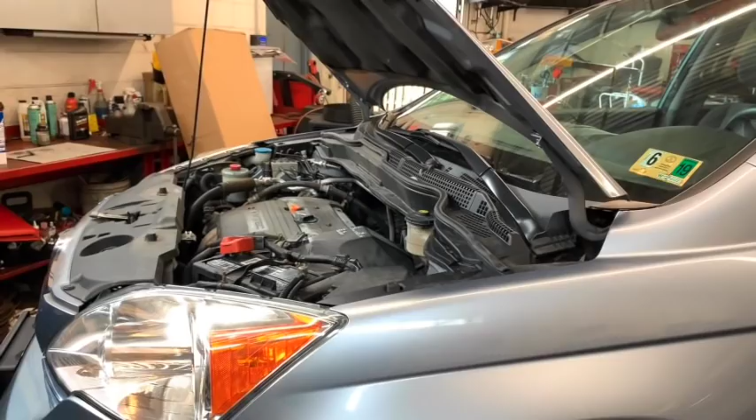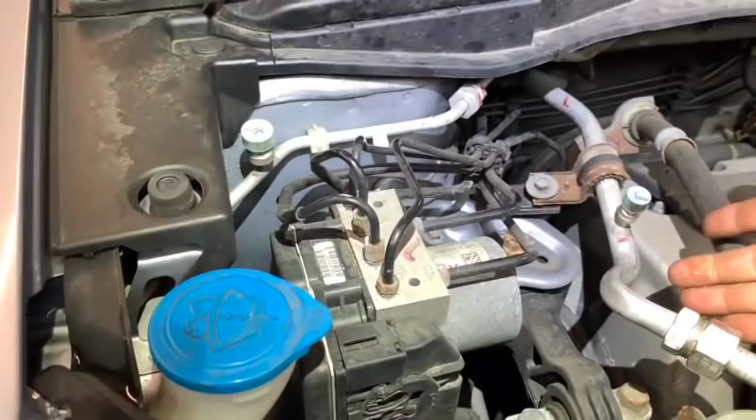I have a diagnosis video. So this is a 2008 Honda CR-V. The customer complaint is that the AC is not working. Usually the first thing I check is pressures, and this valve was broken, so it leaked all the freon.

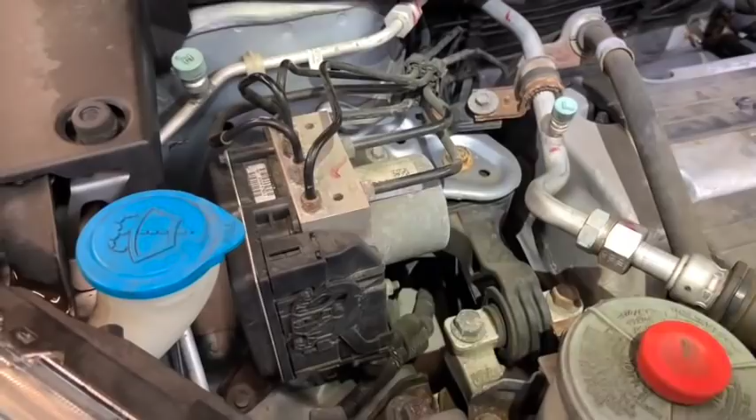It was empty, so I did a vacuum and recharged it. It held vacuum very well, so I said it looks clean, no problem. So I recharged it, but the compressor doesn't want to come on. So I want to share how the diagnosis process went to find out exactly what the issue was on this car. I already know what the issue is.

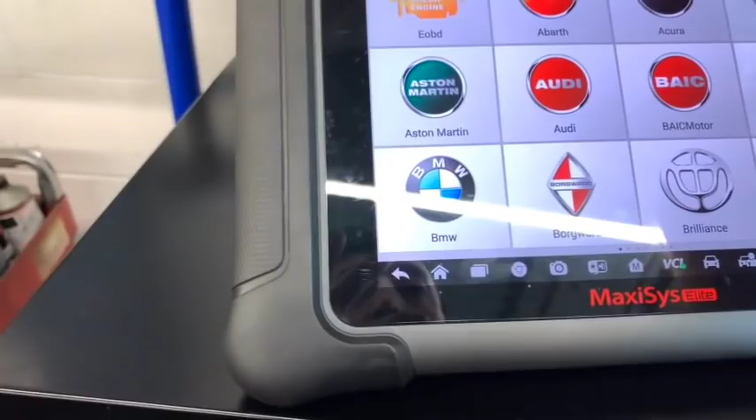So first, I want to just show you a little bit of what I did and what you can do when you have a problem, because it might not be the same on your vehicle.

Sorry for the glare, but it is what it is. Let me try to put this someplace different. I was here, well, not as much.

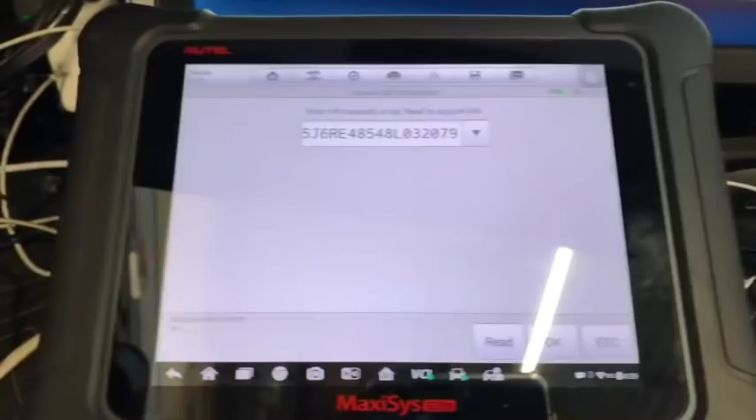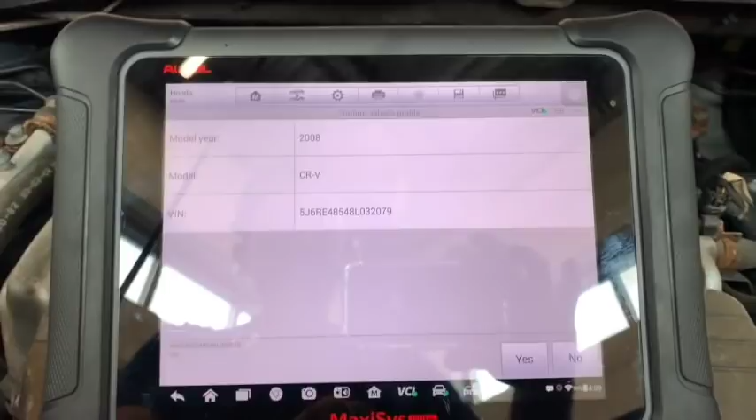All right, so I gotta take you guys to the car to show you the clutch activation. So that's probably the best I can do. It's an Autel, obviously. Sorry for the chop noise.

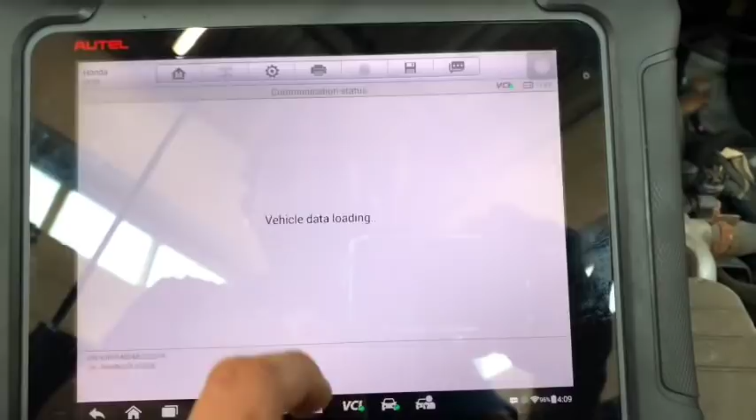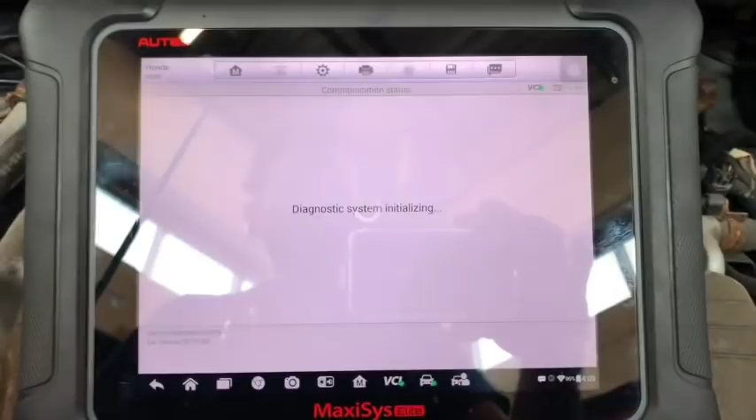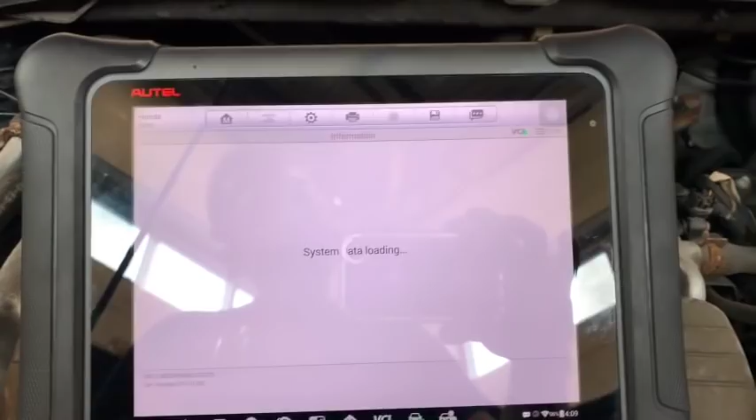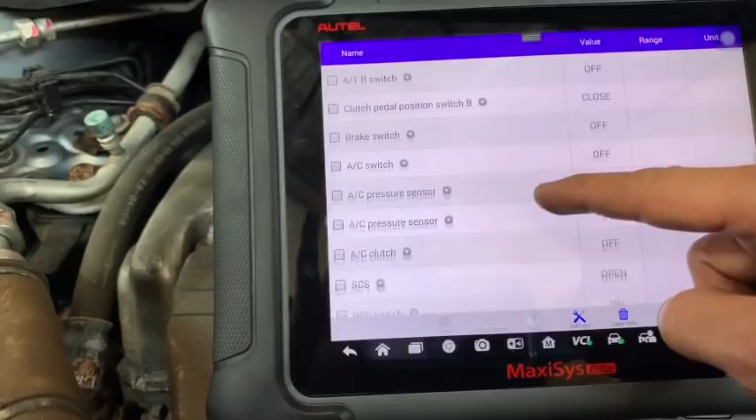So in this case you go on the engine computer, because this is a manual air conditioning, so you will not have that function. And it's just reading live data. So we're going to select the... I'm scrolling quick because I know pretty much where they are. Okay, right here. So you have pressure, clutch, and switch. And as you can see, they're all off.

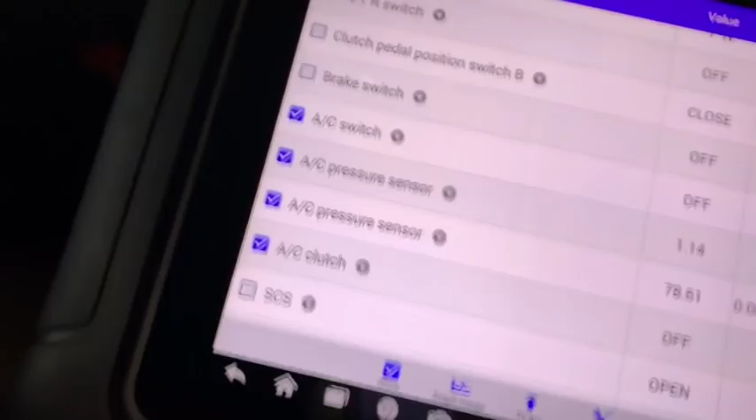So now the car is not running, but you can see the ignition is on, the blower is blowing. So what you have in here is the AC switch, at least on and off, and it's not happening. So that is my first clue. Something definitely is not working.

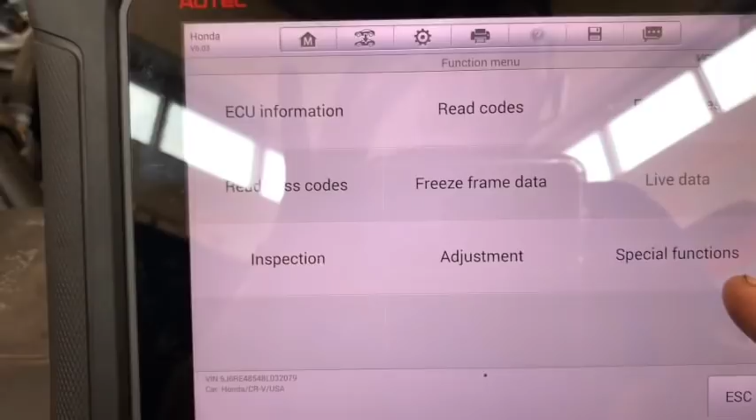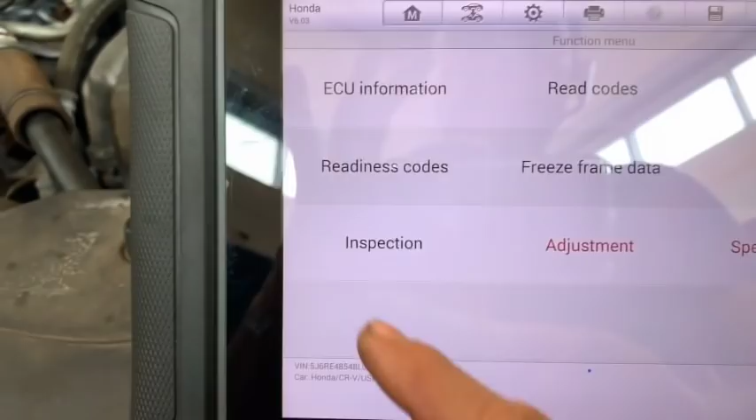But then what you can do with the scanner to find out if at least the clutch and the compressor are good, you can go to functional tests. Oh, I just got out. Sorry guys, sometimes you try to make it quick and it doesn't work. I think in this one it's special functions. No, adjustment. Nope, inspection. Oh yeah, it was the last one, right?

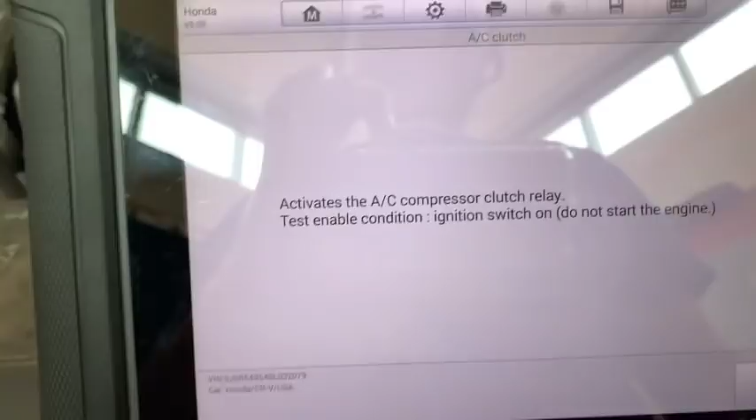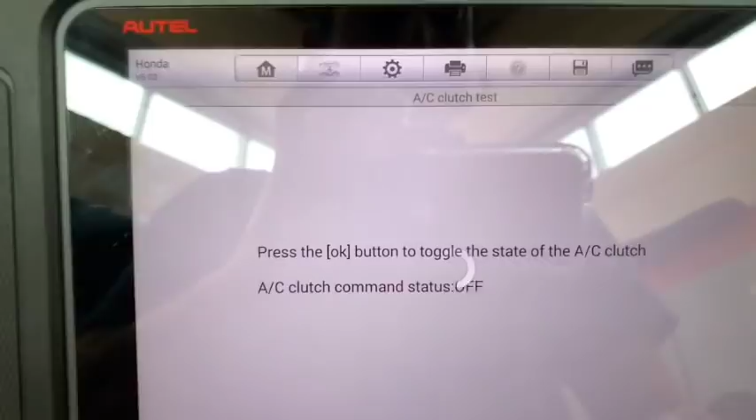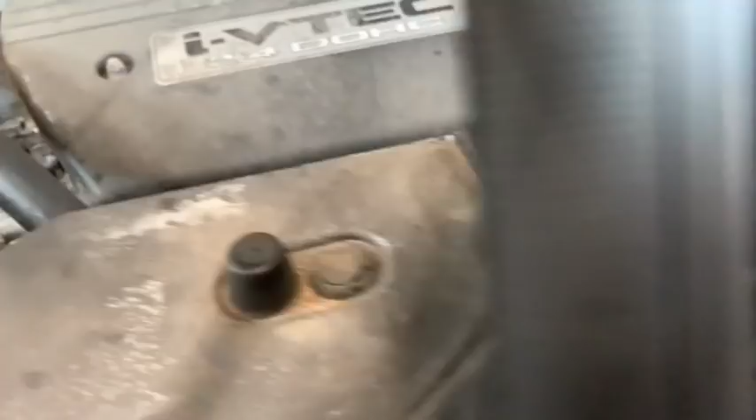Okay, so in here we will get the AC clutch. You can activate the fans, because if the fans don't work, the AC will not work either. So you can do that in here as well. As you can see, this will manually operate the clutch, and the status is off. So on and off. And I don't know if the sound will be there, but I guarantee you it's loud.

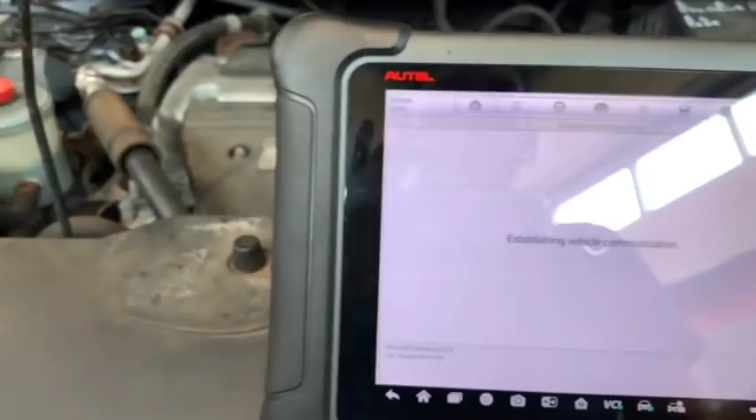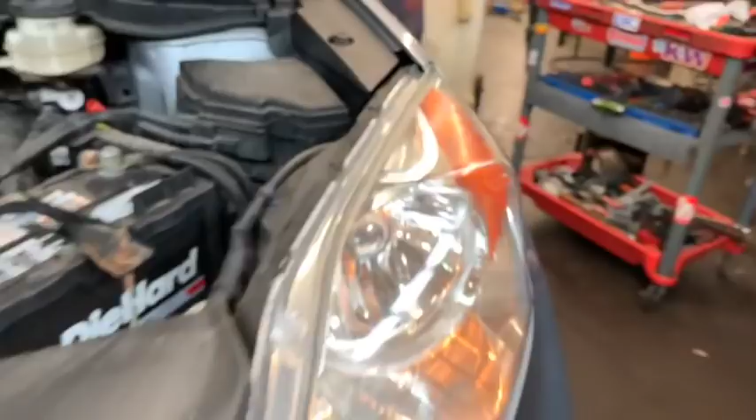So the next thing that I did, again, check the fans, and it's the same thing. And with this one, I need a light. I don't know what I did with it. Where is my light? Come on. Sorry, guys. Let me grab another one.

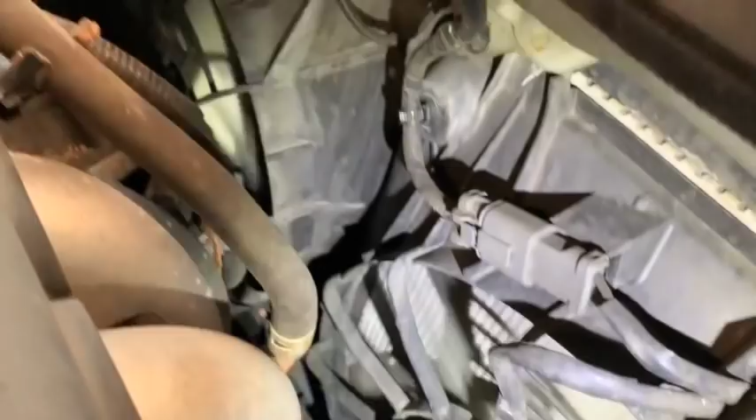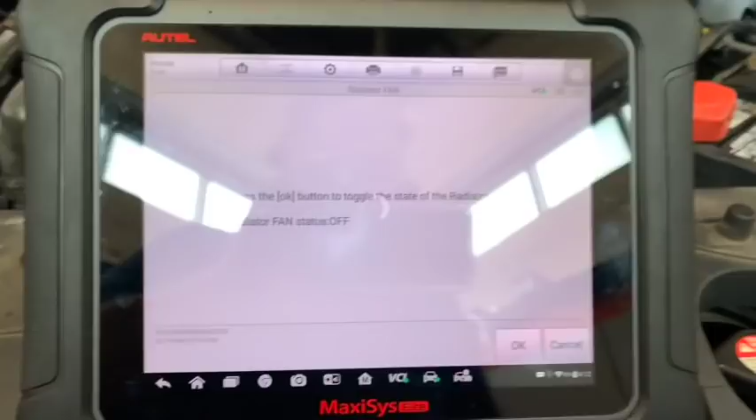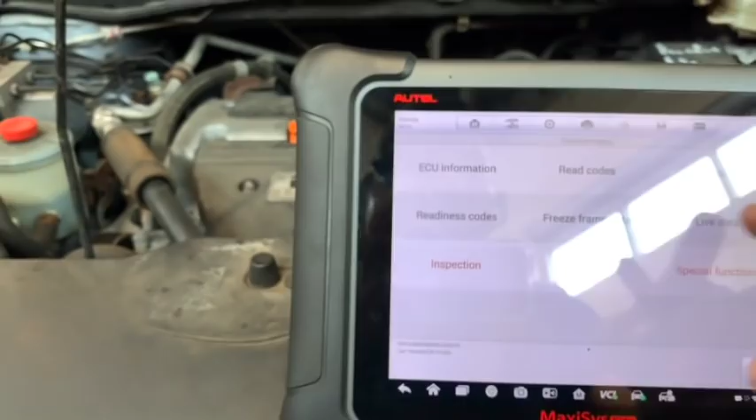So as you can see, the fans are both working, and I can activate them with the scanner. So that means the computer is able to. So again, what am I missing? I'm gonna check the pressure, because I know the pressure is good, and you can go to the live data, and hopefully you guys saw in there it's like 80 something.

Where is my other flashlight? In the meantime, I'm looking for that. All right, I'll look later.

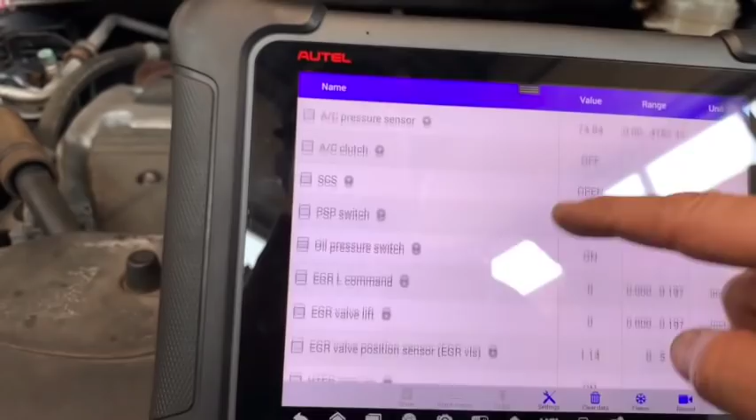And since obviously the AC is not running, you're just gonna have a static pressure. Maybe I just went too much.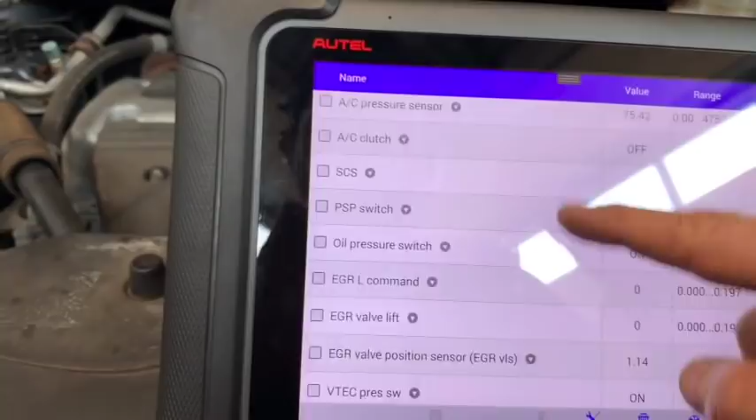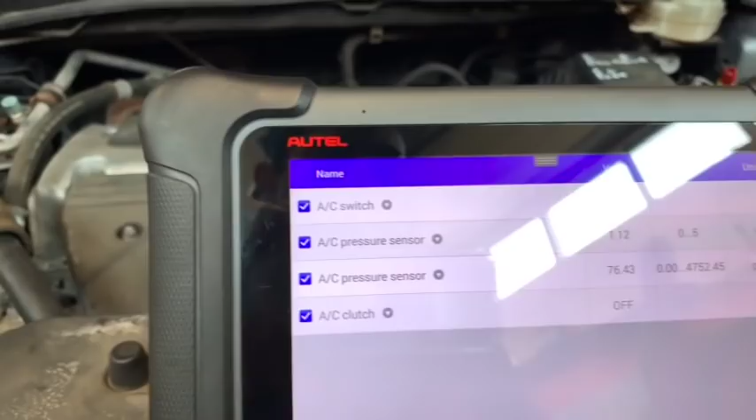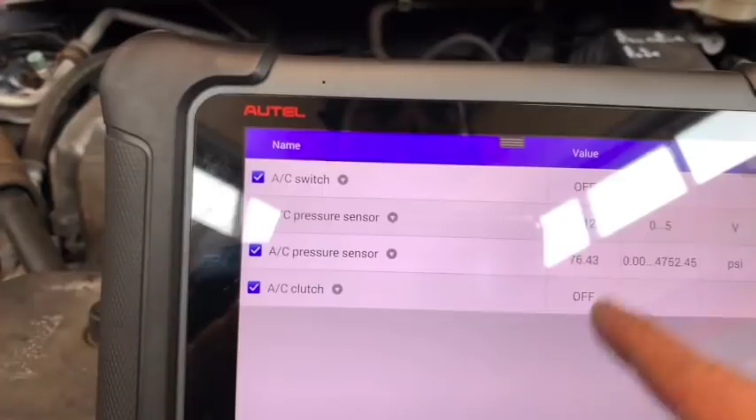Yep. So again, this is just a bit that we need to see. So we got like 76 pounds, which is, the temperature of the day is actually not that warm. And we're like probably, I don't know, 65 or close to 70. So let's call that okay. As long as you got more than 25 pounds of pressure, the compressor should work.

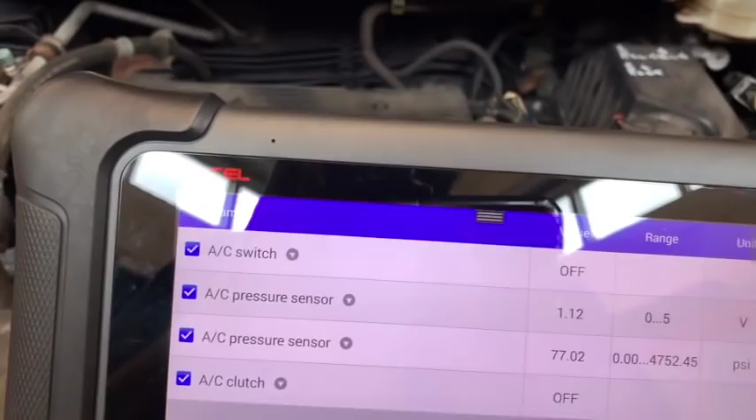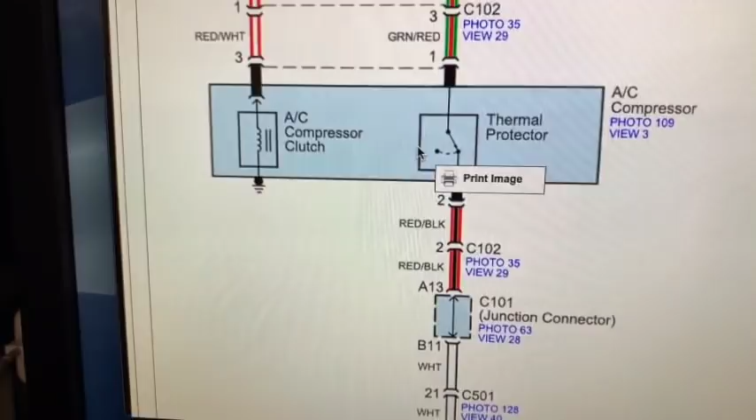The other thing, the fans need to run, and so is the blower. Otherwise, the compressor will not be coming on by default. The other thing that you have, and this is what I want to take you guys, is this compressor, this system has a thermal protector and it's normally closed. If these are open, that would be a protection because let's say it's too hot, but the car hasn't even run, so it should be normally closed unless it gets too hot.

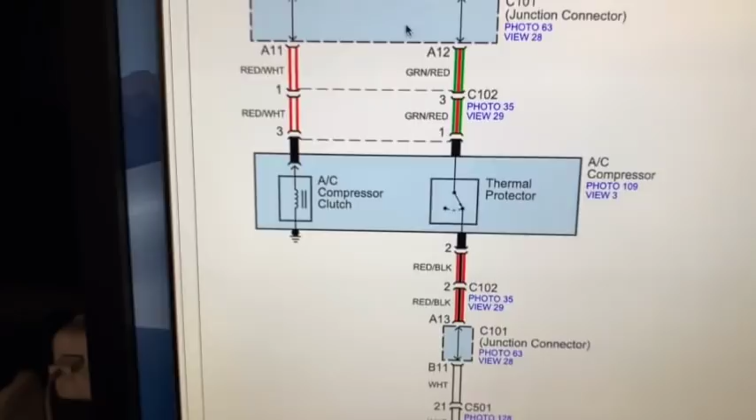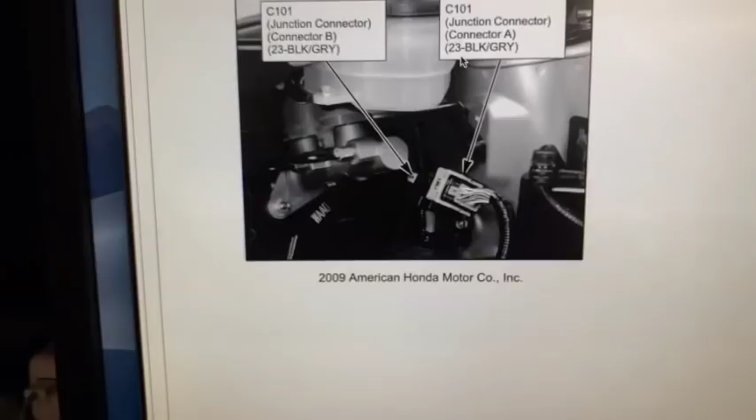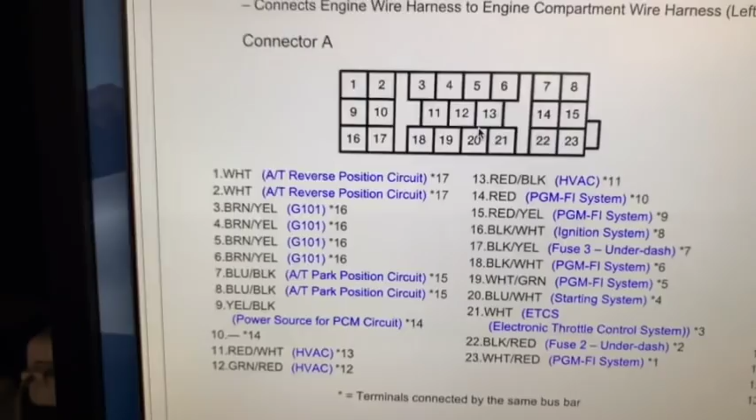Nice thing about Identifix, and this is the OEM side of the wire diagrams. It tells you, like I was looking for a good place to check and don't have to be under the car, blah, blah, blah. So I found this C101 connector, but what is it? Identifix: on the wing, right next to the brake master pump. And also, we can get from here the view of the connector, which I already printed, and it tells you each wire.

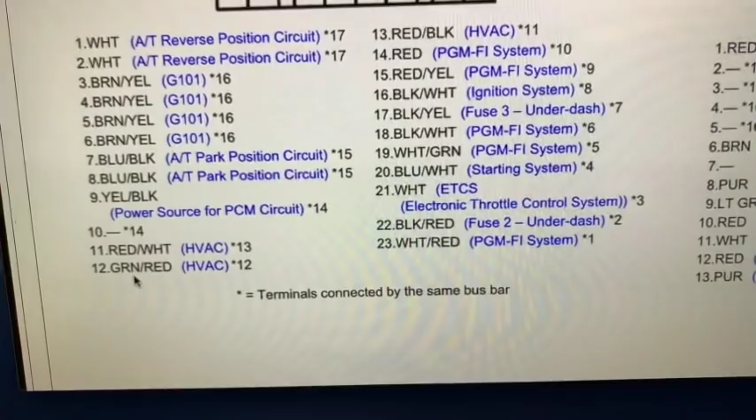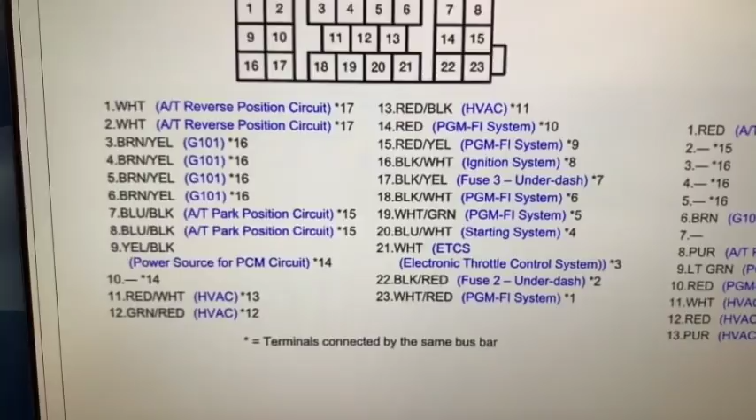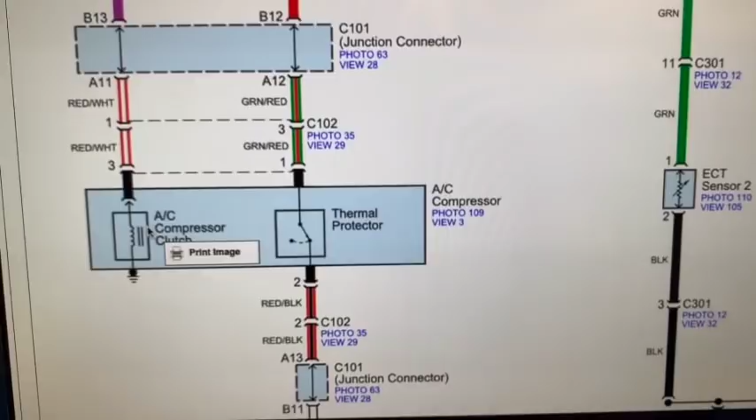So we will be looking, and I go back to the wire diagram. But the two for the thermal protection are the green red 12 and the red black 13. I think 11 is the red white, which is the power for the compressor. Let me go back to the wire diagram. So yes, we have three wires. Thermal protector will be green red and red black, and then the other one we will not even test because I am assuming since I can manually command the compressor clutch to close, this one is fine. The only one that I cannot do any testing is this one.

Sorry again, because sometimes I repeat myself. It's because I can hear myself on my headset. So bear with me a little bit.

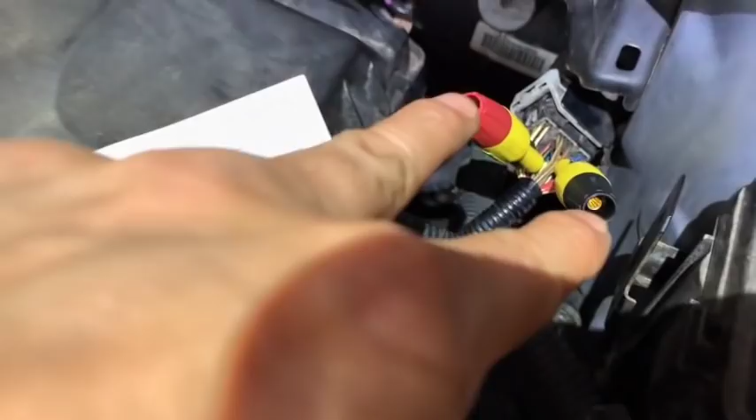All right, so we have that connector right here, and I already found the pins 12 and 13, which I printed, the same thing that you guys saw in there. And I have two piercing probes because for the position where that is, it's very hard to get a needle or something that you can actually trust 100%, right? So this is a thermal protection. So I can just use a jumper wire because that's exactly what that thermal protector will do, which is just a straight wire.

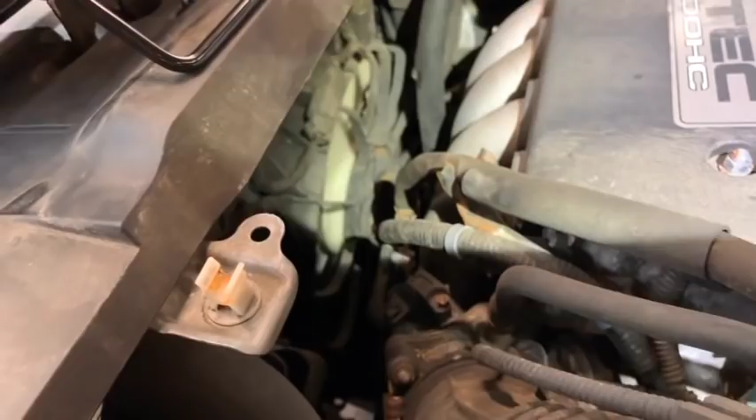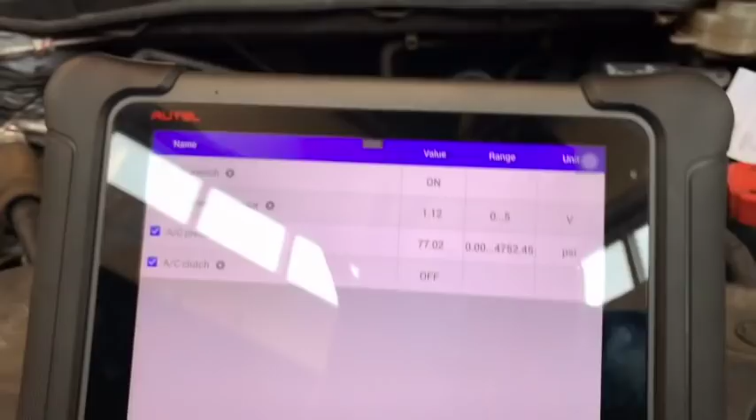And you look at that. The fans are on, and AC switch on. Obviously, the clutch is not on because the car is not running. But as soon as I remove that, off. I just connect it back on. So that's it. The thermal protection is no good. Everything else on the car, because now I can go on the switch inside, and that's why I brought the scanner here. Because all I'm going to do is turn it off and turn it on, and now you see that, off,

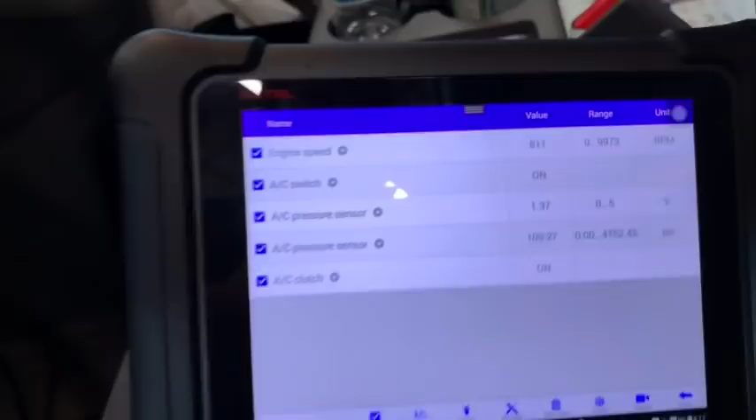on. I got full control, and now I can start the car, which, let me put the RPM so you guys can see that it's running. So the car is running. Now let's put the AC to work, and it's cold, beautiful. So that is a normal operation. You can see now that the clutch is on, the AC switch is on, and the pressure is completely normal.

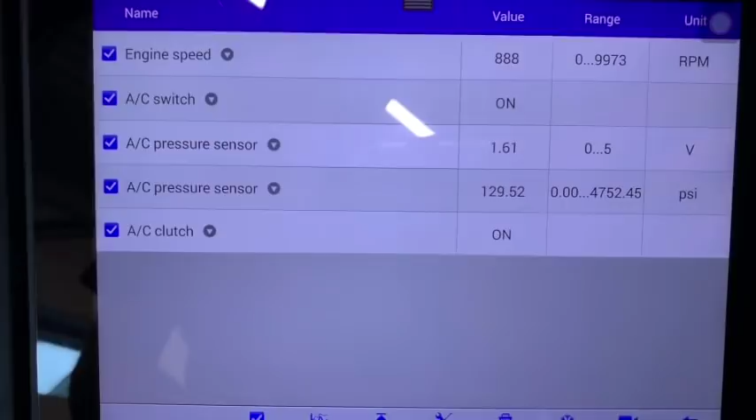So again, a thermal protection causing air conditioning not working. And I think in this case, the whole compressor has to be replaced. We'll see. But again, this is just a short diagnosis video, hopefully not too long.